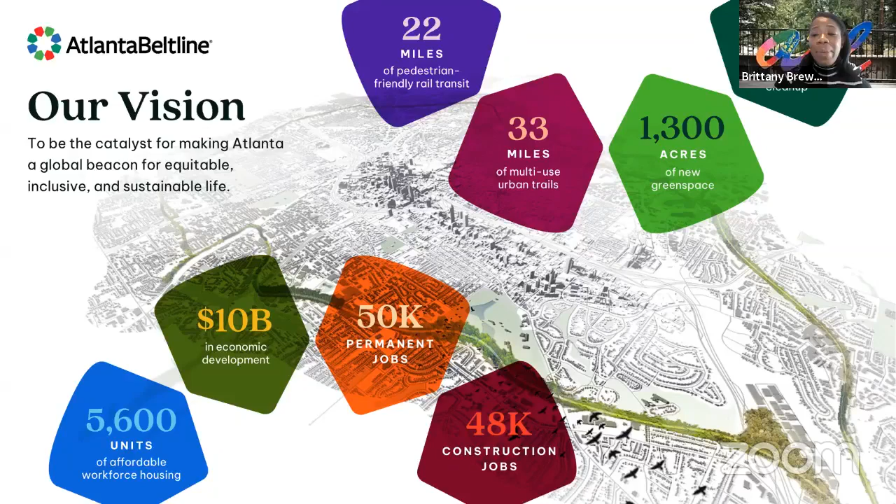All right, thank you. I am here to talk about Northeast Trail segment 1. This goes from Westminster Drive, following the Carriage Trail through Piedmont Park, and ends at 10th and Monroe, where the East Side Trail currently ends.

This photo is actually of the Carriage Trail under the road that takes you into Piedmont Park. This section of the trail is open and has been open for some time, but I'll get into that in the next slide. Our design team is Heath and Lineback.

Our construction team is Reeves Young, whom a lot of you guys have met over the last year. We're at 90% construction completed. This is almost the most painful part of construction, when you're almost there, but there are so many little things that you need to tweak or install or follow up on. So construction completion, we're tracking mid-November.

The majority of things will be done. We did have some pretty long lead times on items that I'll get into in a couple slides, that we're still kind of waiting on to arrive. I think the ribbon cutting date will be announced soon, either if it's not already announced—it might be tomorrow when it's announced through all the ABI social. And the funding source is our TAD.

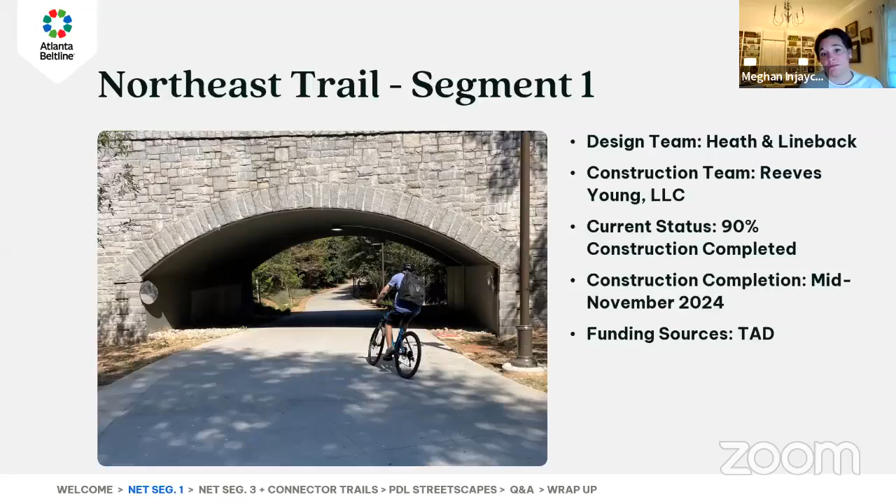Next slide. So Carriage Trail, again, this is the part that goes through Piedmont Park, connecting Westminster Drive to Evelyn, which is the street where you come in and park either for the botanical gardens or the park itself. It was open months and months ago for people to start using.

We did have temporary handrails in place so that we could open it up for people to use, and we have since removed those temporary handrails in order to take them back and paint them. I think they should be reinstalled pretty quickly next week. So we're painting them black, and then they will have a black mesh installed in front of them so that you don't really see them as you're traveling through the Carriage Trail, which is heavily wooded. It's a beautiful part of the park.

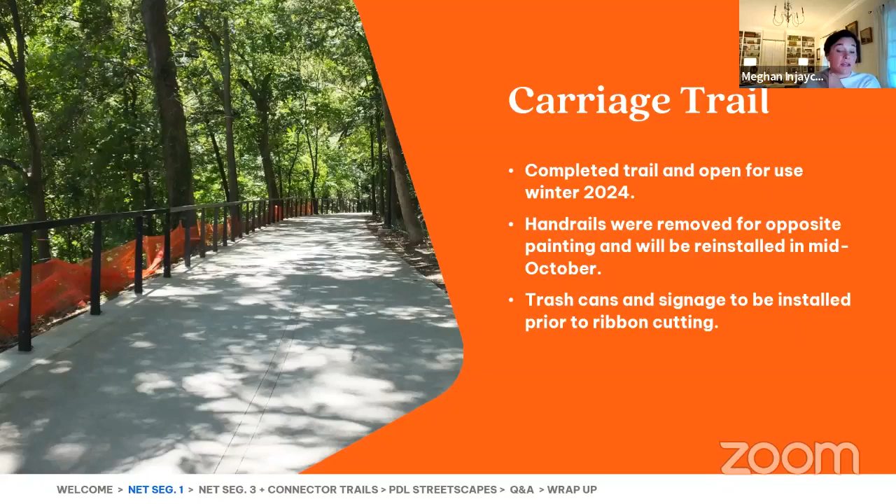We still have trash cans to install, some bollards to install, and signage along this area before the ribbon cutting. Other than the handrails themselves, this is pretty much done. Next slide.

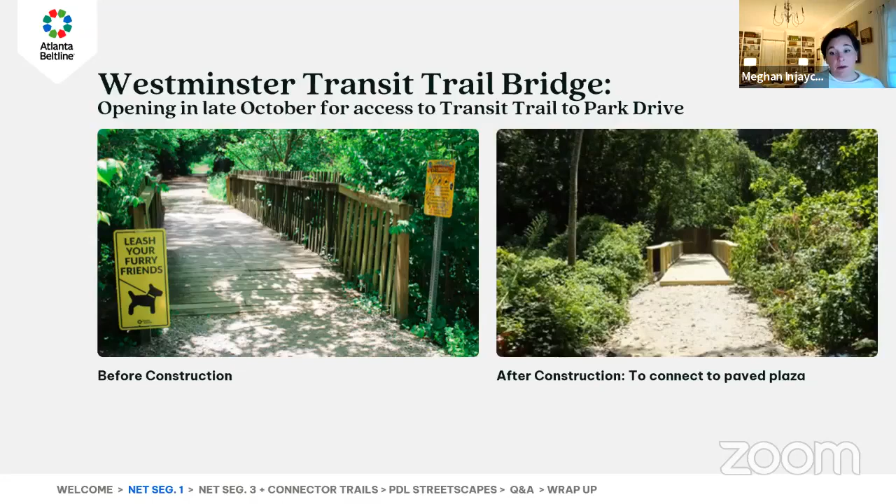We've gotten a lot of questions on when the Westminster Transit Trail Bridge will open. This was a late add to our construction scope, but it needed to be done. Reeves Young and our design team designed an update to the bridge that had been there a long time and was looking a little worn. This connects Westminster all the way through on the gravel trail to Park Drive, under the Park Drive Bridge. It is cordoned off right now. We still have to finish paving the plaza at Westminster Drive. The large granite blocks for seating were delivered last week, so we should be pouring that within the next week or so. We know people are anxious to get through this access, so it should probably be in the next three weeks that you guys can use it.

So, next slide. All right, so the biggest stretch within our old railroad corridor goes from Evelyn to Park Drive.

You can kind of see us pouring right here in the top left slide. This starts at Evelyn Street by the parking deck and the Carriage Trail and goes all the way to Park Drive. On this corridor right now, we have installed the majority of the storm drainage after a hurricane came through, and it is working well. We've paved the trail, installed the fiber duct bank beneath the trail, and the lighting and cameras are up in this area. They are being tested. I'm not sure when we will have our 30-day burn-in period when all the lights come on and we make sure everything's good, but that should be coming soon.

The walls have been built. We are building out most of our handrail structure at Evelyn right now. We have about 500 linear feet to go, so we're working around the clock trying to get that in before the ribbon cutting. The stainless steel mesh you see throughout the Beltline corridor is also coming, that's one of the things we're waiting to be shipped in order to install.

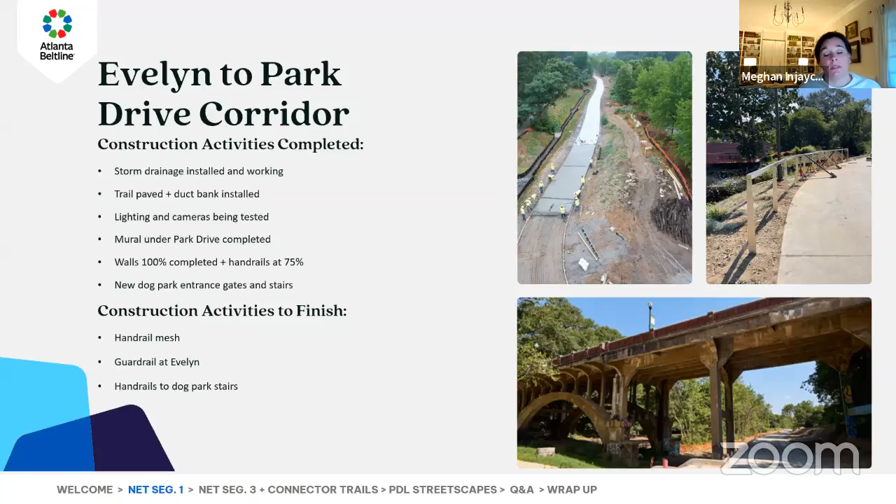All right, so this is kind of Park Drive to Monroe. The top left photo is at Park Drive, these are the new stairs completed that go down to the new dog park entrance. We're coordinating with Piedmont Park Conservancy on when and how to open that entrance, right now it's locked. The photo next to that, top right, is the ramp that's mostly completed that goes down to the large meadow at Piedmont Park.

So we've done all the storm drainage. We've got probably 99.8%, if not 100%, of the trail poured between Park Drive and Monroe. Lighting and cameras are currently going in and being tested as of today. The access ramp and stair at the Park Tavern parking lot is the photo on the right. The ramp is in, the stair is being poured in the next couple weeks, it's a lot of concrete going into that thing, and then we will come back with the handrails.

So construction activities to finish here, again the stairs, and then the Cresthill access, which worked through the hurricane, which is great. There's been a long history of flooding issues coming down Cresthill and onto the corridor, so it seemed to work really well. We are going to revise some of the curb lines on it and add a planter at the end of Cresthill, as well as a guardrail so that we don't have vehicular traffic trying to hop the curb and get into the Park Tavern parking lot.

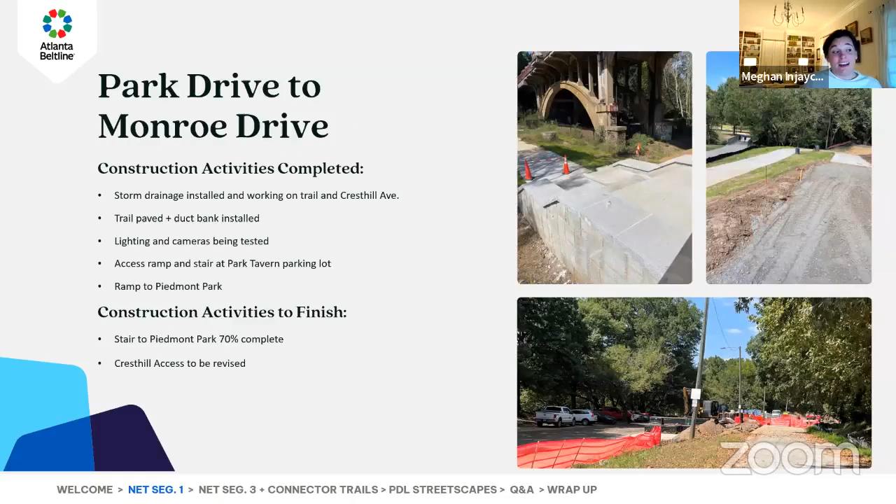We've also got guardrail going up in the Park Tavern parking lot right now. Signage and trash cans will be in place for the ribbon cutting. And we are switching out, as you can see in the bottom photo, those wooden light poles for something a little more aesthetically pleasing on the trail. Those will come in probably February, they have a really long lead time in shipping to get to us, so those will come later after the ribbon cutting. Next slide.

And this is the slide you all came here for. Construction activity is completed.

The storm drainage has been installed at 10th and Monroe. The trails, both of the incoming trails, have been poured.

If you guys travel on the East Side Trail a lot, first off, thank you. We know it's been hectic and a mess and probably not very pleasant for you all traveling, but really, thank you guys for being patient. We hope to be able to remove all of our barriers, barrels, and fencing soon, hopefully by next week. But both of the trails have been poured.

You might notice there's a totally different angle on the East Side Trail. This is to align with the crossing to the new Northeast Trail, segment 1. So this is kind of the pivot point between both trails.

Lighting and cameras have been installed. I think one of the last lights might have gone up this afternoon on the Northeast Trail. The traffic signals, the new ped heads, or I guess they'd be bike lane signals for the 10th Street bike lane, and the huge new mast arms for the new traffic signals are up. They are not on yet. We will start our testing next week. I'm going to get into that in a moment, but they are up.

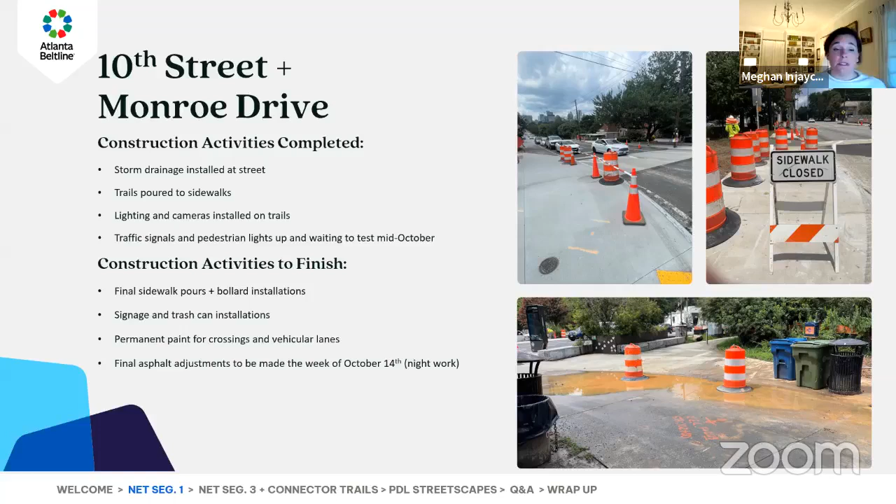So next week, I think we're going to start getting signage out, just warning people of night lane closures starting tomorrow. But it's not a full closure. And we also have APS fall break next week, so we specifically chose this week so that we would be able to work longer day hours and also not have any interference at night with any of our night work and activities going on either at Midtown High or at the stadium. So with that, I think that was my last slide.

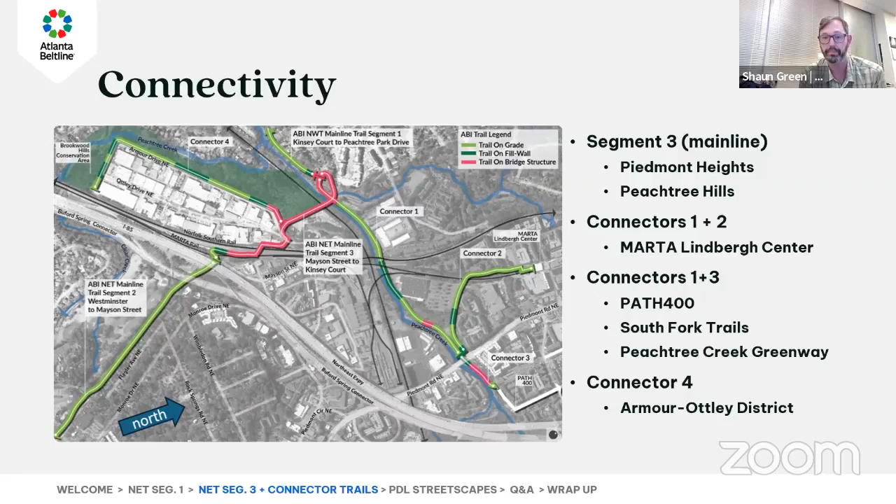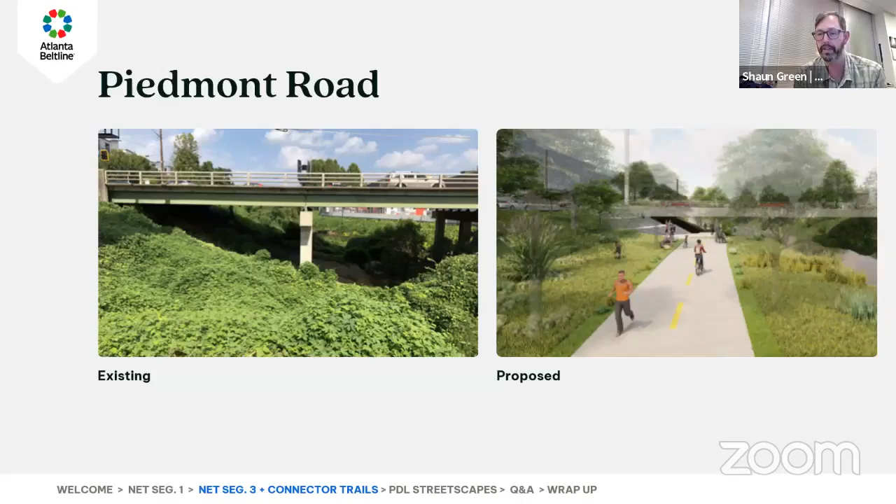to the east with the Beltline. And within this proposed imagery, you can kind of make out the switchback ramp that we'll get from the connector trail down at this level here underneath Piedmont Road, up to the elevation of Garson, which is 12 or 15 feet higher. Next slide, please.

Just to get to the point where we can get to construction, we have a final field plan review meeting with our 90% plans with Georgia DOT, I believe next week. We're trying to wrap up our right-of-way acquisitions this calendar year, hopefully within the month of November. Ultimately we have to get our certifications for utilities and our environmental reevaluation, and all of the right-of-way needs to be clean. With those certifications, we get the request for a PS&E package, which stands for plans, specs, and estimates - the final submittal for Federal Highway Administration review.

With that review and concurrence, they'll authorize funding, which is our critical path to get the bids out and opened, and ultimately start construction. So there's still a little bit of work to do, a lot of work actually, over the course of the next 9 months or so. But we're on schedule, and we should be able to get this thing going into construction this coming summer. So I think that's my last slide, and I'll turn it back to Nancy.

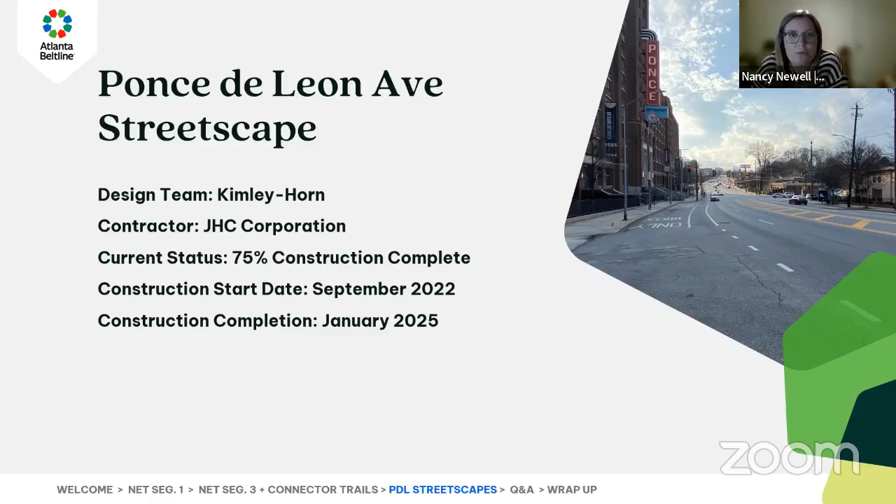Kimley Horn did the design on this and prepared the construction drawings we are working off of. JHC Corporation was awarded the contract a couple years ago and has been the GC on this project. We are currently at about 75% construction completion. Really, we just have the ramp to do - that's the last thing that will close this out, but we can get into that in the next slide. We started construction back in September of '22, and we have an estimated completion date of January 2025.

Before we get into the rest of this, I did just want to take a minute to give a shout out to our friends over at ARC. They awarded us the LCI grant, which is the Livable Centers Initiative grant, and without their partnership, this project might not have been possible. So again, thank you so much to ARC.

If you have driven Ponce, or live around there and have seen construction going on the last couple of years, you're probably well aware of all of these items. For those new to the party, we have reconstructed the sidewalks along both sides of Ponce, from Monroe to Freedom Parkway. We've added a landscape buffer and trees where there was room. Speaking of trees, I do know a few did not make it through the planting last winter - we are aware of that and have already taken a few of those down. There are still a few that are up, and this coming planting season we will be replacing those, so don't worry if you've seen those and been questioning that. We've also installed lighting on both sides of the corridor.

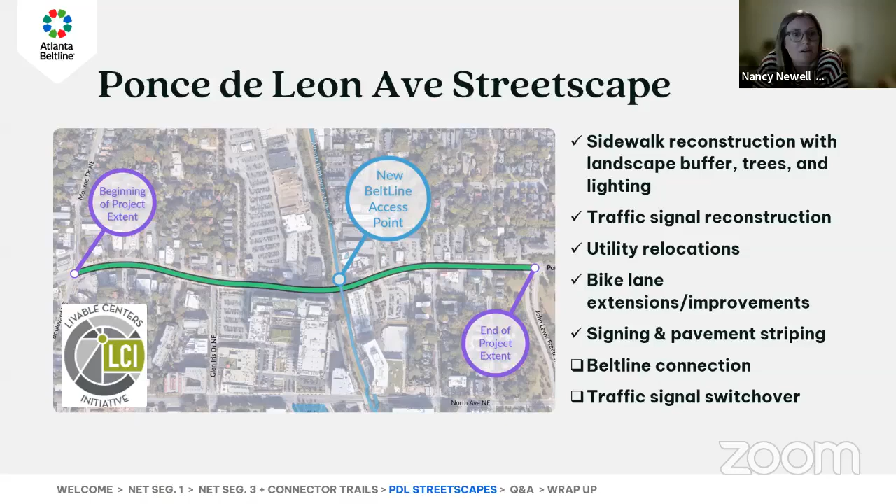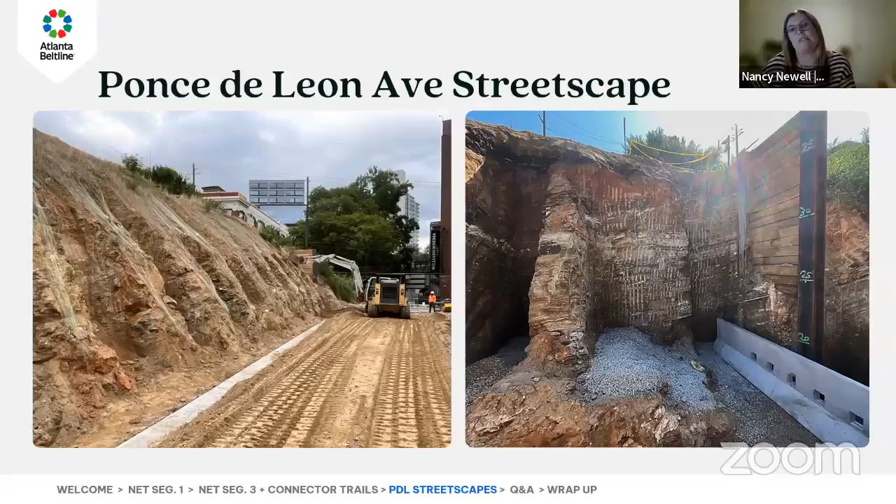That's because the wall system they're using comes in pieces and actually fits into those little slots, stacking onto each other. In the photo on the right, it's kind of hard to see, but there is a footer at the bottom of that photo, and that's what the wall actually sits on top of. You can go to the next slide.

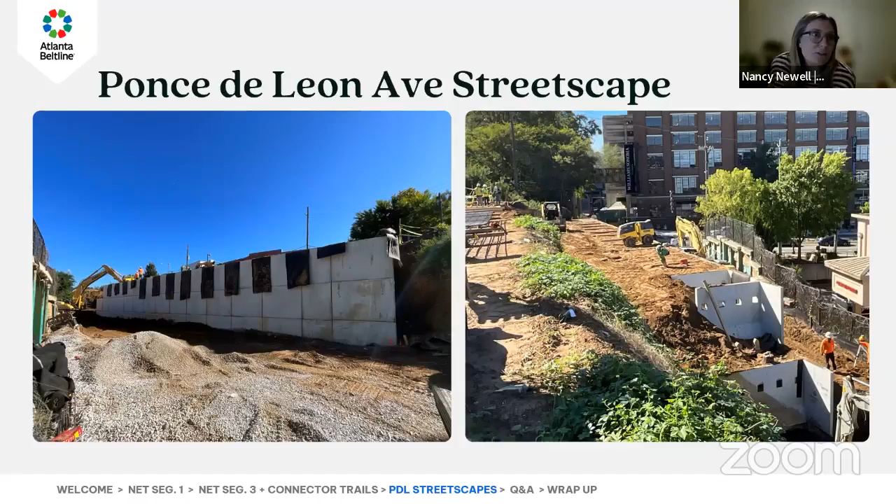The photo on the right was taken from the trail, looking down on that wall, and you can see where it's been backfilled. They put a row down, backfilled behind it, put another row on top, backfilled behind it, put another row — so they're just stacking and backfilling as they go. It's a pretty new system for us. I don't think we've ever used this type of wall system on our trail before, so this has been pretty interesting to watch. All right, next slide.

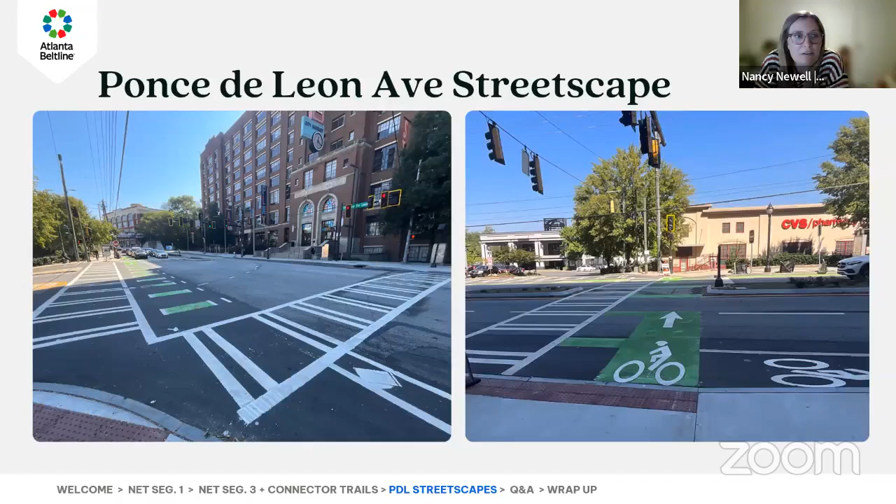Okay, these are showing the signing and pavement markings that have been completed, both in front of Ponce City Market. The photo on the right shows the new crosswalk we installed. Before we started, there was just one crosswalk on the west side of Ponce City Market at that intersection with Midtown Place. We installed a second crosswalk to help with the flow of traffic, bike lanes, and pedestrians trying to get to the ramp or the northeast side of that intersection, so they don't have to cross over the busy Midtown Place driveway. That finishes my slide, so I'll turn it back over to Brittany.

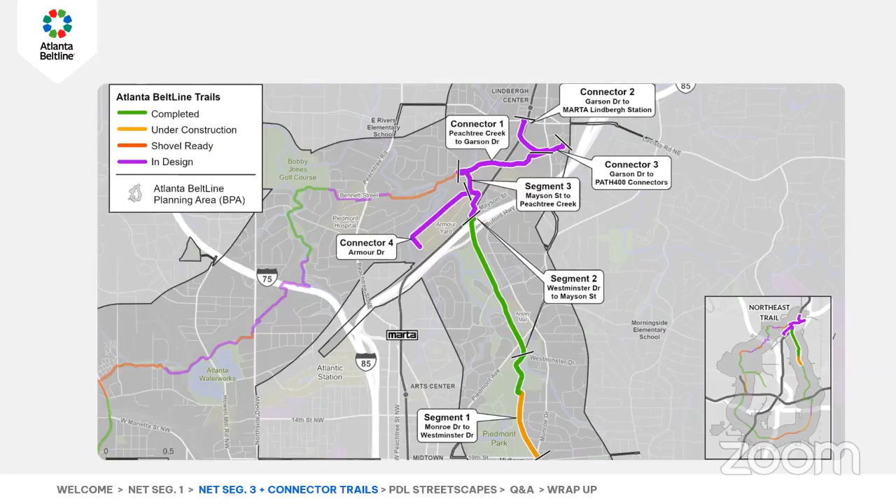So Brian, when you come out of the 85 tunnel on the north side of I-85, where these purple lines are, the trail, the Northeast Trail segment number 3, has a short half mile of main line to connect up into Peachtree Creek, which connects to the Northside Trail. That will be the connectivity that completes the loop, if you will. But there'll also be other connectivity to get over to Piedmont and up Garson to MARTA Lindbergh, or underneath Piedmont to get to PATH400, or around Armour Otley as well.

That construction schedule starts this coming summer, is what we're targeting, August of 25. And to the question Hugh has, we're looking at about 3 years of construction for everything that's in purple here. It's not to say we won't be able to work with a contractor to bring something forward, but there's a lot of, I'll call it, contractor choreography here.

We're going to have to build this thing in a certain way because so much of it is on structure and the access is very limited and tight. We're going to have to do a lot of order of operations - that's going to be absolutely critical to a successful construction project, because if it's not done properly, we'll end up building stuff that gets in the way of other construction. So there's going to be a lot of backing out, go all the way in and then back out. Once we get a contractor on board, we'll have a lot more understanding of schedule and means and methods. Until then, we're just making projections. So best guess right now is 3 years of construction starting in August of next year.

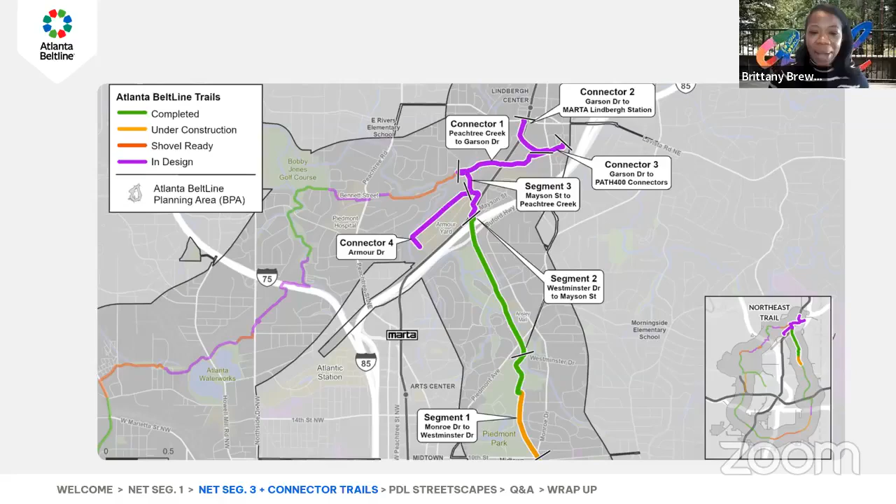Great, so that punches out both of those. Yeah, it does.